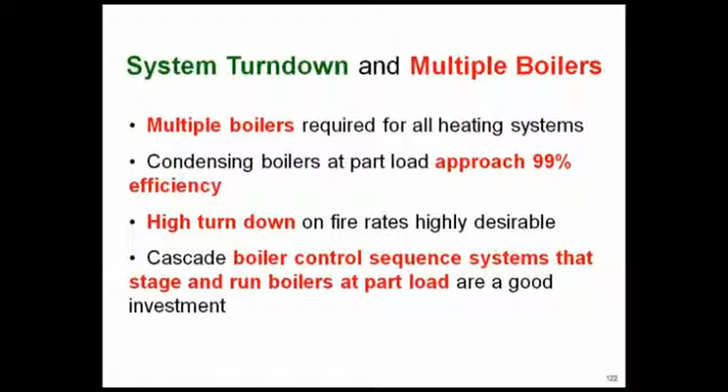You're paying the money for variable speed. You're paying the money for condensing boilers. Codes are driving you that way. Let's make sure we take full advantage of it. In the old cast iron boilers of my generation, 40 years ago, we used 3-way valves. We had pretty much constant flow through the systems.

They were big old cast iron boilers. They had hundreds of gallons of water in them. They were huge. You go in the equipment room, they filled the whole room up. It was unbelievable how much water was in these things. We normally designed them on 20-degree delta T, so we had pretty big pipe, pretty high water volume.

We didn't have the outdoor air reset numbers we've got today. We had outdoor air reset, but it was nowhere near as much. It was slow changing, so it was much easier to adjust on. The controls on these things were very simple. Most of the big old cast iron boilers had a simple Honeywell strap-on or insertion aquastat on them that maintained the boiler at some number, 150 degrees.

So all the water in the boiler, hundreds of gallons, was at 150. You didn't have any condensing problems. They kept them hot. They were simple. Now, specific heat, I bring this up because you know what it is, but I want to get fundamental. The next slide, I think, is actually more important than this one. I'm just defining specific heat here.

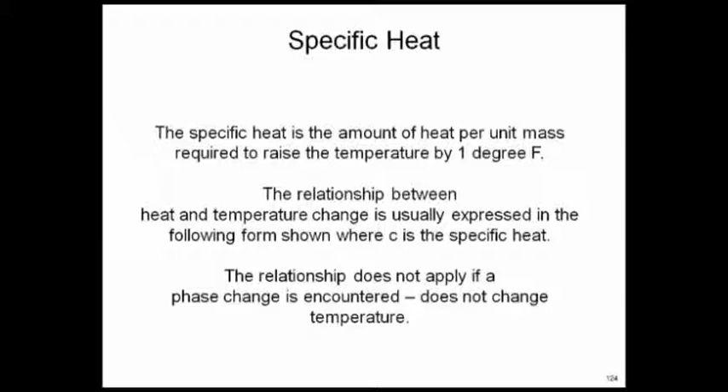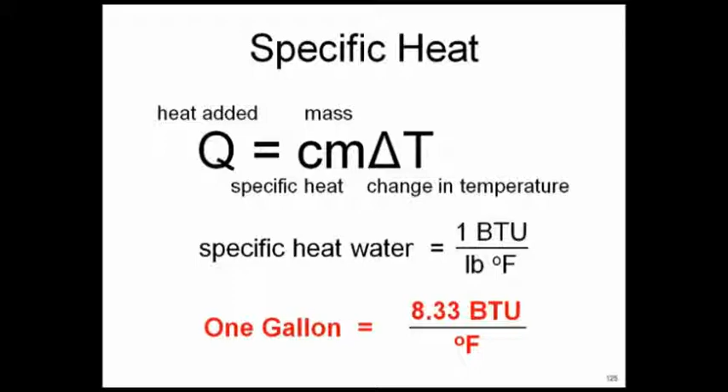Let's look at the numbers for water. By definition, specific heat being 1, 1 BTU is going to raise a pound of water 1 degree. So if I've got a gallon of water, 8.33 pounds, then every 8.33 BTUs of energy I put in a gallon of water, that gallon's going to come up 1 degree Fahrenheit. And I don't care whose boiler it's in or where it is. It's going to be the same all over the world. That's a message you need to understand.

What's happening with the new systems? We talked about the old ones. This is the point I want to get across. The new systems, we're going to 2-way valves, right? The code's making us go that way. 90.1 says you've got to vary the flow. We've gone to 2-way valves. We've got variable flow systems. No questions asked. We made that change.

The new boilers, though, have smaller heat exchangers, particularly the water tube boilers, really small. You may have an 800,000 BTU boiler that may only hold 10 or 12 gallons of water. There's just no water in there. Very low water volume. We're going to higher delta T's on the design. We're no longer using 20. I see 30 just about everywhere. I see a fair amount of 40-degree delta T.

Why? We want cold return water temperatures on our condensing boilers to get the efficiency up. We want cold return water. It means your pipe sizes are smaller. It means there's less water in there, less volume. So your pipes are smaller. The boilers are smaller. Begin to see a problem here. Fast changing loads. Now we've got these sensors.

We got a bunch of people in the room, and they come in the room. All of a sudden, they want so much outside air per person. So you quickly open up a damper to bring in outside air. So we got fast changing loads based on these new outdoor air requirements. And we expect our boilers and our systems to sense this quickly. That's what we're talking about, quickly, and respond.

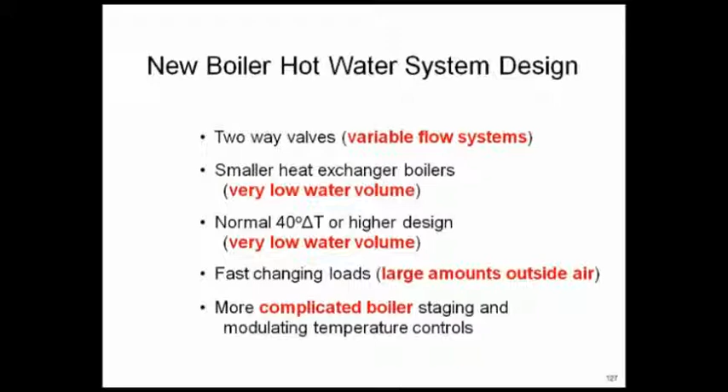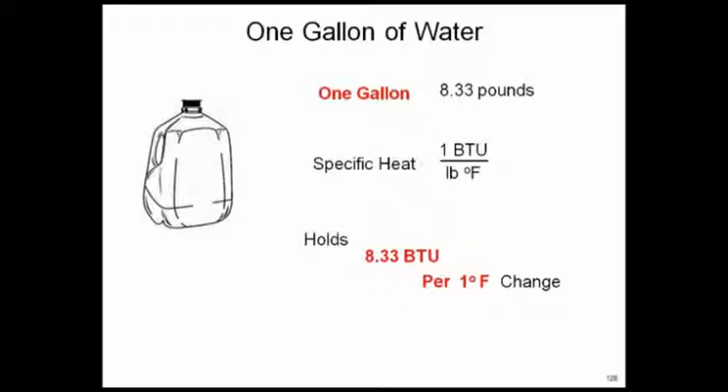We also got more complicated boiler staging, and we're trying to modulate temperature control. So everything has gotten more complicated in newer systems. We've got to tie all of this together to make it work properly. Let's go back to my gallon of water. I'm not trying to insult you. I want you to realize that a gallon of water in anybody's boiler is still a gallon of water. So if I put 8.33 BTUs in it, it's going to come up 1 degree.

So here's what I'm trying to take you to. Let's take a typical system, and let's just use 180 as a set point. Set point could be 140, could be any number you want. How do you turn a system on and off? What is true delta T for the boiler in a system, and how does it set up? So let's just take a look at a modern boiler setup and make sure we kind of understand what's going on. Let's just take a set point of 180, and let's allow 12 degree delta T total. Well, that means if you look at the set point of 180, and again, it could be any number you want to. I'm just taking number 180.

If my set point is 180, I'm sensing supply water temperature to the system. As that number goes up, my fire rate comes down. In other words, if the temperature is going up to 182, I'm taking the fire rate down, on down, on down. And I've got to take it off somewhere. In other words, here's what's going on. If the boiler is putting more energy BTUs into the system than the load is taking out, then the supply temperature is going to do what? Start going up. And sooner or later, you've got to take it offline.

So we're saying at 186, I'm taking everything off the line, that my boilers are putting more energy into my system than I'm taking out, so the supply water temperature is creeping up. And as it goes up, sooner or later, I can't keep on doing that. I've got to take it offline.

Now, if I'm matching the load with my boilers, if my boilers are firing at a rate that is exactly equal to the load of my system, which they're good at, my set point being 180, I can hold that set point pretty close. I can hold it 180, maybe half a degree, right? I can hold it nuts on as long as I can modulate and put the BTUs into the system that you're taking out. So what I'm talking about is what happens when I'm putting more BTUs in the system than you can take out, and your temperature starts rising.

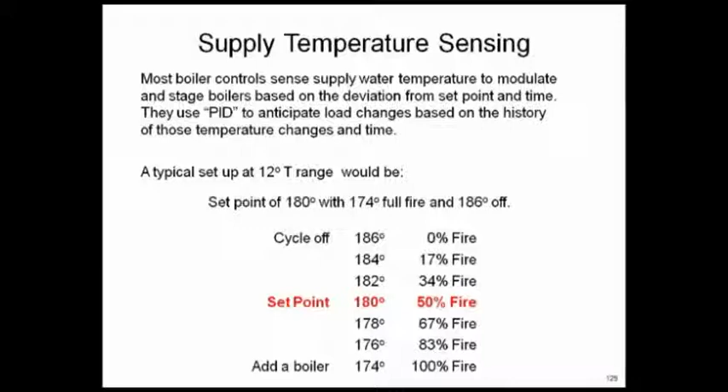We've got to look at volume. So let's take a look at this thing. If I had a 2 million BTU fire boiler, typical 2 million BTU boiler, and I don't care if it's primary, secondary, or variable primary pumped, every boiler has to be started. And if you got a 2 million BTU boiler, and let's say that's the full fire rate's 2 million, let's see what the start fire rate may be.

In this case, I'm saying 30%. In other words, I'm saying I don't care what the turn down is on your 2 million BTU boilers. Most boilers will not start at turn down. Let me repeat that. Most boilers will not start at the minimum turn down. What I'm saying is, you're turning a 2 million BTU boiler on.

You've got to go through a purge cycle. You've got the fans that are going to come on, make sure there's no natural gas, and make sure all the air is in there. They're going to test all the controls. Then you're going to fire it up and get everything hot, and then you start modulating down. And that doesn't sound like it takes very long, but it can take 40 to 50 seconds easily. Let's assume it only takes 30 seconds.

Now, please stick with me, because this is one of the major issues we've seen with these boilers at low flow rates, and I think you need to kind of get it in your head, please. If you do this and you have a 2 million BTU boiler, and let's say at startup, it starts off at a fire rate of 30%. To be honest with you, most of them start off with a fire rate higher than that. Doesn't last long, but you don't start at the modulation reduced rate. You start at some fire rate based on the controls.

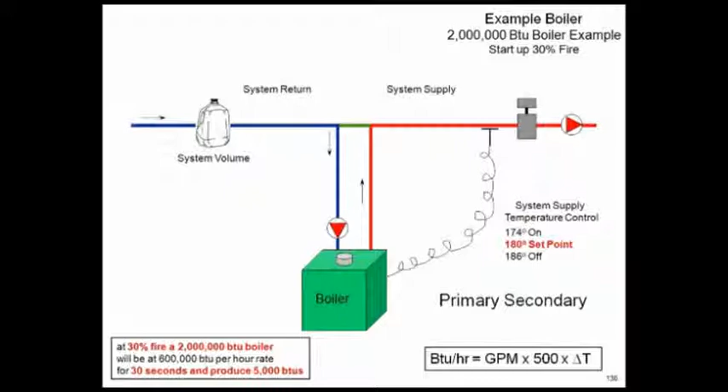So if I got a 2 million BTU boiler firing at 30% fire rate for 30 seconds, how many BTUs is that? It's 5,000, as shown on the slide. 5,000 BTUs you generated in 30 seconds. What could happen in 30 seconds? Sounds pretty easy, doesn't it? I don't care if it's variable primary pump, it's the same issue. I've got 5,000 BTUs I'm putting in this boiler in 30 seconds. At startup only. I can modulate down after startup, but I've got to get it cranked before I can modulate down. I've got to start it.

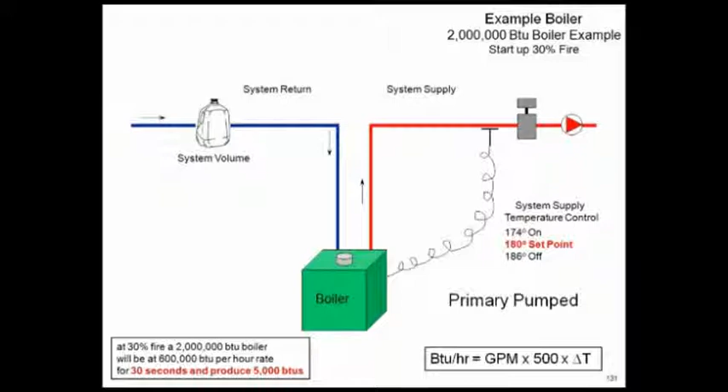So what does that mean? Well, supply temperature sensors and the temperatures on these boilers, they all have to have some time to work. On a direct sensor situation, I'm using 30 seconds. In other words, between the fire rates and the temperature I'm seeing and the response time of the boiler, I'm saying 30. If it's an energy management system, building management system, it could be longer. It could be 45 to 60 seconds. You can take any number you want here, but these are very conservative numbers.

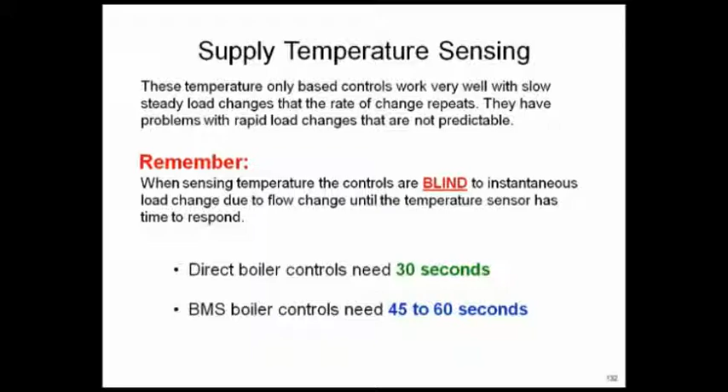I'm telling you, between the time you set the boiler to fire up and get going, there's some period of time before it gets under control. It takes a while to get it under control. So what happens in this 30 seconds is kind of the question. Let's just say we had very low flow rate through the boiler. Let's just say the boiler had no volume of water in it. No volume, maybe 10 gallons. Can't even really count it. Very low flow rate of 10 GPM. What would happen in the boiler in 30 seconds? Think about it. What would happen?

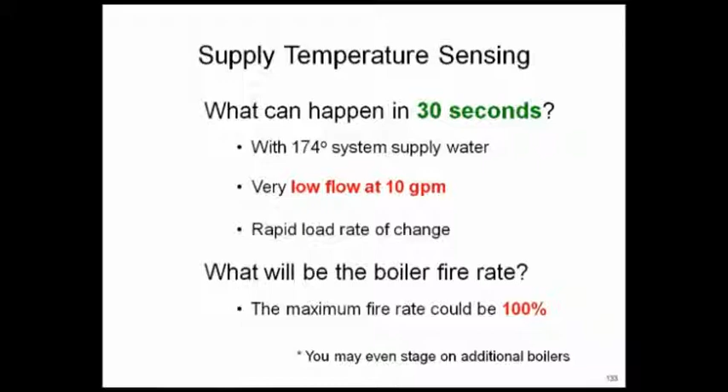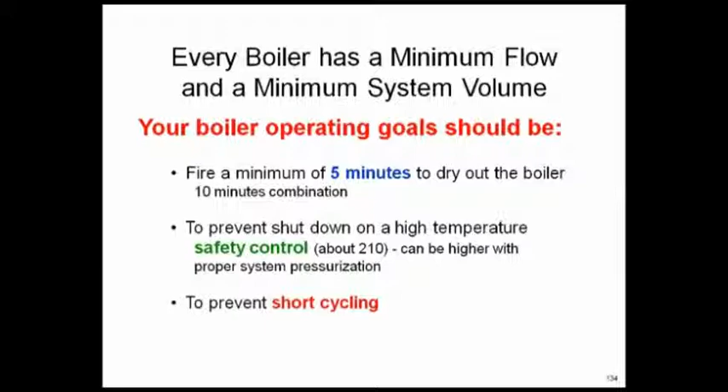Let's go back. So every boiler has a minimum flow and a minimum system volume. Your boiler operating goal should be to do what? Fire for a minimum of 5 minutes, run for 5 minutes, and be off 5. We want to make sure we don't hit this manual high limit safety, normally set at 210. The green safety control is a manual high limit, and we don't want a short cycle.